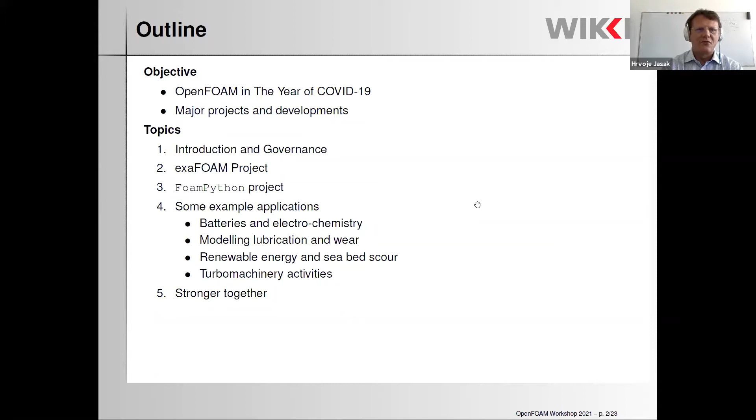There is quite substantial news to talk about, and I always like showing some nice presentations. I have already seen two of them stealing my thunder, which is really nice to see, because usually I steal the nicest presentation slides from other people and show them in the keynote before everyone else. So thank you, I will point out who the people are.

So to start, thank you to the organizing committee. And here you can see the list of some friends, old friends, and very very old friends. As Philip said, he's in the category of old friends. I know Neal Murphy longer than I know Philip, so we'll call him a very old friend. And Professor Alojz Ivanković is definitely my very, very, very old friend. But let's not pick on him because he might speak back.

On the right-hand side, I was really happy to see this logo made out of mould-free additive manufacturing. But then I realized that it says I-Form rather than OpenFOAM, but hopefully we will be able to deal with that. The virtual event in 2021 is a huge amount of effort as usual, and I'm really grateful for everyone who has put in the work to make this event happen.

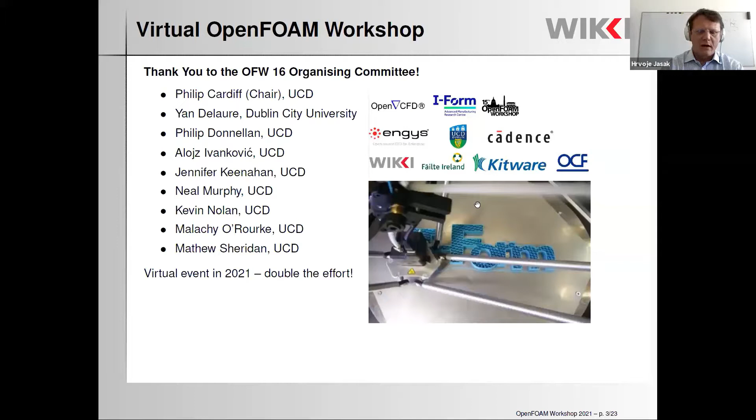I have been talking to a bunch of people over the last year, and I always start with the same question: are you safe and well? How are you coping? And to this I will add the question of, has COVID made you take up some strange hobbies? Here's a little movie of a strange hobby.

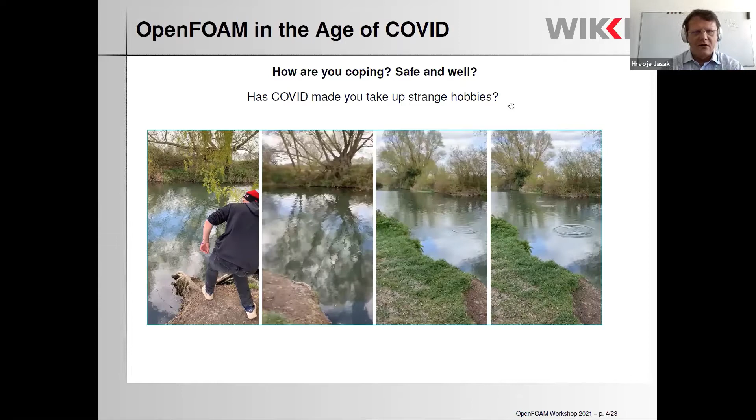Just as a comment, this qualifies as experimental work, and I don't do experiments, so it's not me, in fact. But what you can see here is the game of skipping stones, which brings us to the first showcase that I would like to show, which is a numerical study of skipping stones at the University of Cambridge. It's done as part of the master project by Stefan Nixon under the supervision of Professor Stuart Dalziel.

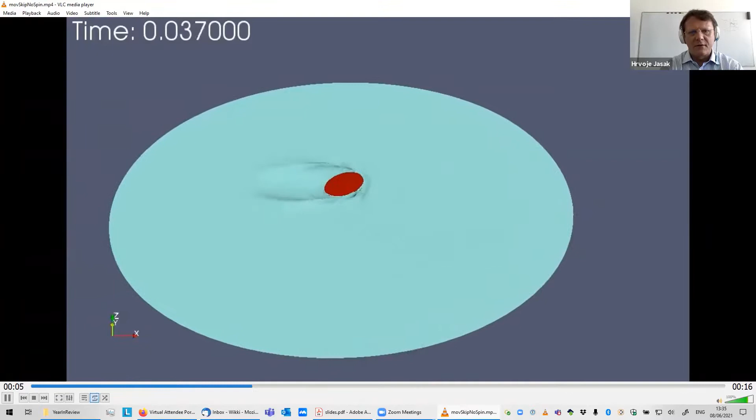And the software being used is the Naval Hydro Pack with all the bits that we have. I think it's fair to mention one of the sponsors, which is Pointwise, which in the meantime has become Cadence. So what we are doing here is wading into the arguments of what can happen when you're trying to skip the stone. What you can see here is a 6 degree of freedom stone moving, hitting the free surface and then pitching up.

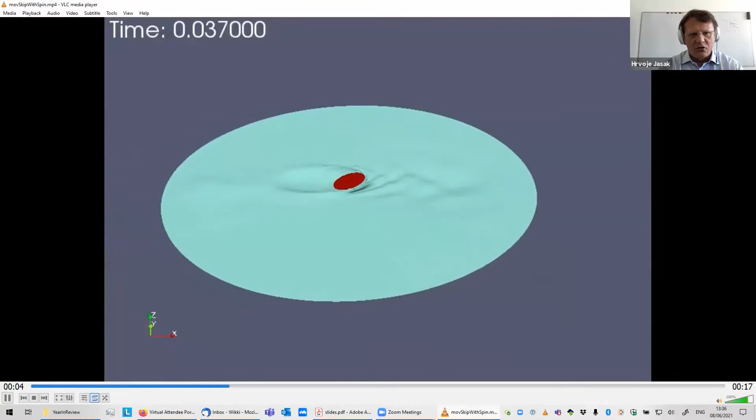6-year-old Hrvoje used to think that this is how you skip the stones, but in fact it is more complicated than that. There has been a big discussion about whether you can do that without rotating the stone around the vertical axis. So if you add vertical axis rotation around it, then the stone will jump off differently, because the rotation around the vertical axis gives it gyroscopic stability.

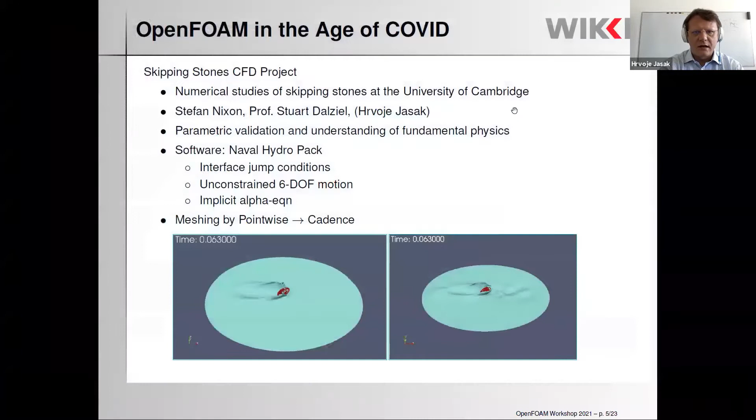These are preliminary simulations, so our free surface gets messed up a little bit before the impact, but now you can see nicely how the stone turns. Interestingly, this is a subject of some concern, meaning that doing experiments is not easy. In fact, a set of experiments has used a rate of rotation of about 100 radians per second, which is faster than I can throw the stone.

What I like about this is that doing experiments with skipping stones is not as easy as one would imagine. With CFD, we can quite accurately model what is going on. Because of the experience that we have in the simulation of free surface flows, we can actually put error bars on the simulation and carry on with that. This project has kept me amused through the winter, and I hope in the summer that I can join Stuart and do some experiments myself.

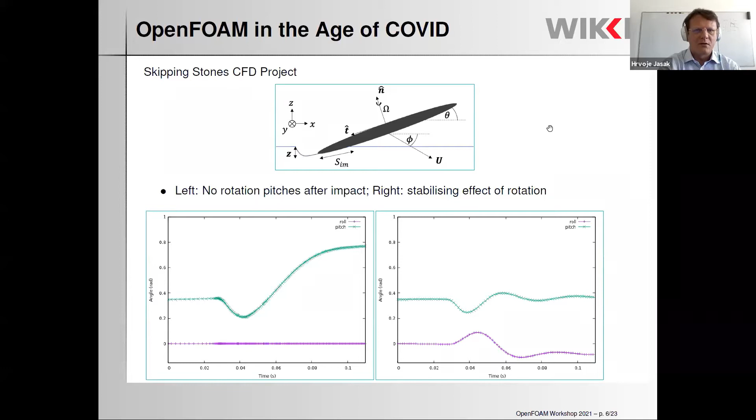So what are the other news? For me, the most exciting news is the OpenFOAM governance. The committee activities are wrapping up. We are meeting - you can check that on openfoam.com.

Governance - Dr. Fred Mendonça of ESI OpenCFD will speak about that in his keynote. And I would like to put to the spot Professor Gavin Tabor from University of Exeter, who is coordinating us and making sure that we can do things. There is a list of technical committees, but currently we are also building up application area committees, which will involve things like external aerodynamics, as well as the ones that are written down.

We are seeking members and contributors, so please join us if you can, because in this way we can make OpenFOAM even more useful, not to mention user-friendly. The second big piece of news is that we have a substantial project under the Euro HPC call of 2019 with the idea to prepare foam to actually run properly on exascale platforms.

So we need to address the OpenFOAM technology for industrial users as a priority, and that brings the same capability to the rest of us to get extreme performance on the HPC platform. That involves novel algorithms, rewrite of some of the stuff that may be limiting our efficiency and scalability, refactoring, porting, and seeking other sources of performance.

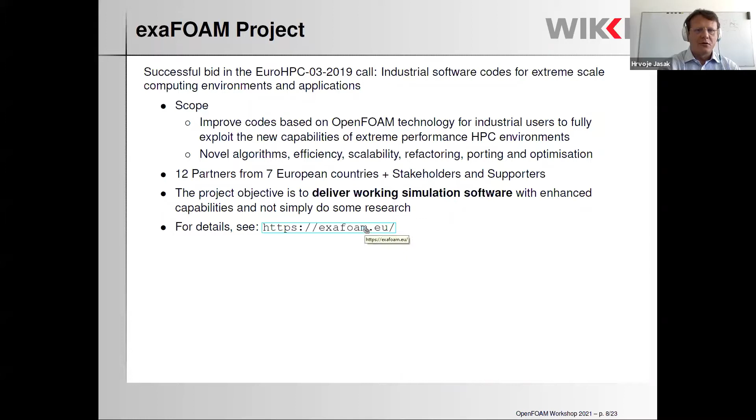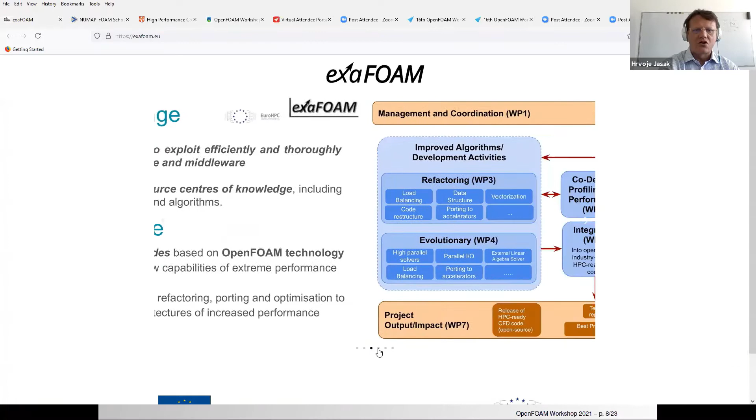The objective of the project is to deliver working simulation software. So we are not just playing, we are actually using the software to deliver the exascale solution. For more information, see the ExaFoam website, where there are a few slides on what the project does, how it is structured, and what we expect to see from it.

It compiles for a very long time. It does all kinds of things. It is hard to use in teaching, and rewriting the CPU intensive or computation intensive parts of the code is hard. So Robert Anderluh from the University of Cambridge has worked with me, or I told him what to do, in order to implement a lightweight finite volume simulation framework, which looks like OpenFOAM, but it is written in Python.

The reason to write it in Python is that debugging is easier. We lose a lot of luggage like virtual base classes and runtime selection tables, and we can re-implement the bits of the code which are performance specific to find out who can propose a better HPC framework that can be rolled out within the more demanding C++ structure.

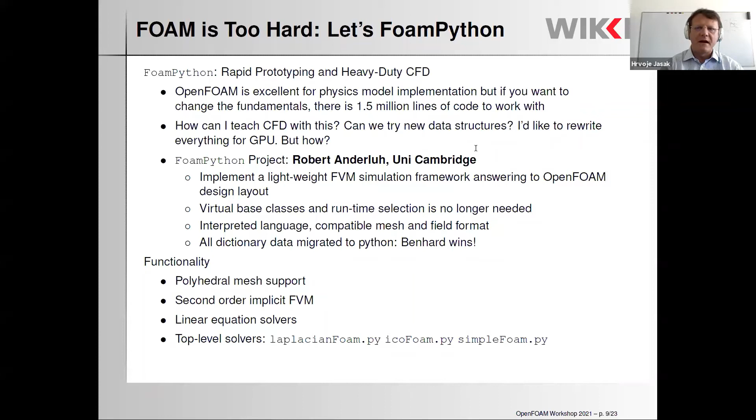All of the dictionary data, input, output, and in fact everything apart from the mesh has also been moved into Python, which means that Bernhard Gschaider and his approach finally win. The kind of functionality that we have is polyhedral mesh support, second order finite volume method, linear equation solvers, and 3 top-level solvers: Laplacian foam, icoFoam, and SimpleFOAM, which allow us to run, I don't know, a motorbike tutorial or some serious external aerodynamics cases and find out how the code behaves.

So what do we get? We are working with a small package. The whole of foam Python is several thousands of lines of code rather than 1.5 million. We can quickly experiment with the basics.

And here I don't mean implementing new turbulence models. I mean changing the way that the solver assembles and solves the matrices, and finding out what things we can do in order to adapt to the new high-performance computing platform.

So here is a little piece of code. You will see that this is not a copy of what OpenFOAM looks like, but actually creates a matrix for the DDT, Laplacian, sums them up, and then calls a solve. All of this is in Python. Robert will do a presentation later on to show you how this is made fast, efficient, and useful using things like NumPy and Cython.

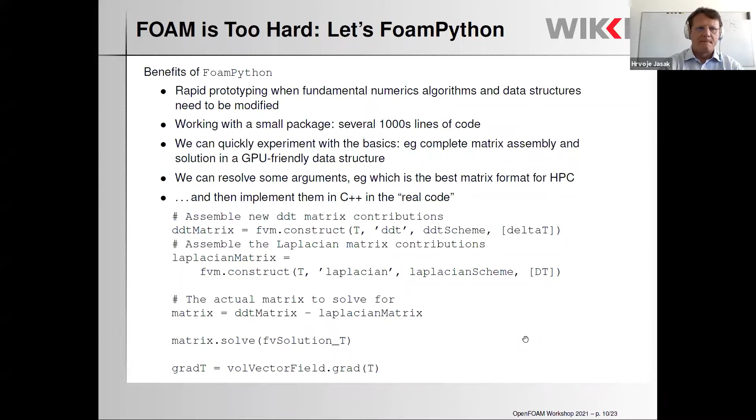Moving on, I have to say that I have already seen an excellent presentation this morning on batteries and fuel cells, which proves my first point - that OpenFOAM can do multiphysics simulations really well. Anything that can be described with continuum equations, with the possibility of zooming into porous reaction zones or microstructures, or implementing surface reaction, fits within the concept really well.

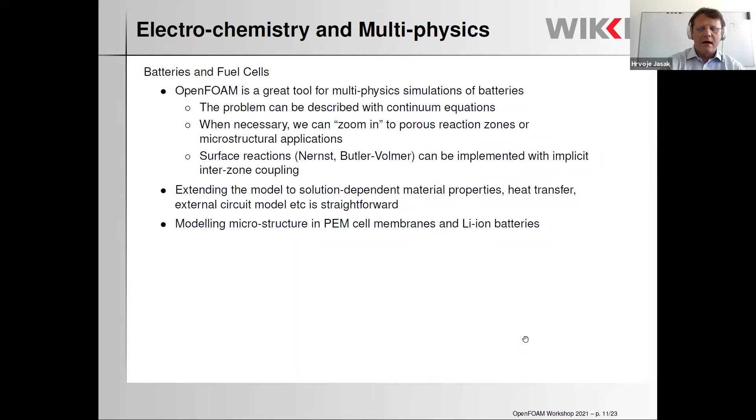In the past, we have done work on fuel cells, but I have been obsessed with batteries for a while. Having done some work on lithium-ion batteries, a new type of battery has really grabbed my attention - the lithium liquid metal battery. It started with a presentation from Professor Sadoway from MIT saying that lithium-ion batteries are not appropriate if you need power. And the kind of power I'm talking about is the renewable energy capacity of the Great Britain network, which can harvest wind and tidal energy, and then needs to store it.

We need high power capability that uses cheap materials, simple design, and will not deteriorate over a large number of cycles. An example of one of those is here on the picture on the left-hand side. So my ideal battery would be liquid, liquid, liquid, but in this one, bismuth at the bottom is liquid.

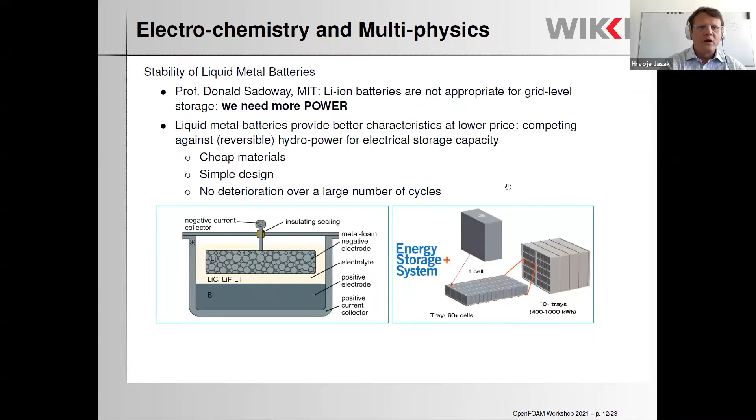Being able to do that is really nice, but it involves problems with free surface stability. The instability occurs because batteries talk to each other through magnetic fields, and upsetting the surface between my bismuth liquid at the bottom and dark blue solid lithium can cause the battery to short circuit.

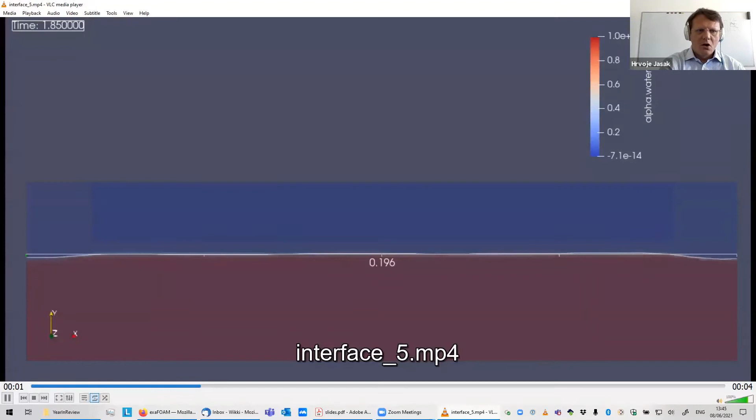What you can see here is a little piece of simulation from Fedor Misyura, again from University of Cambridge, looking at how the thickness of my electrolyte changes and finding conclusions on how to package the components of the batteries together in order to get the performance.

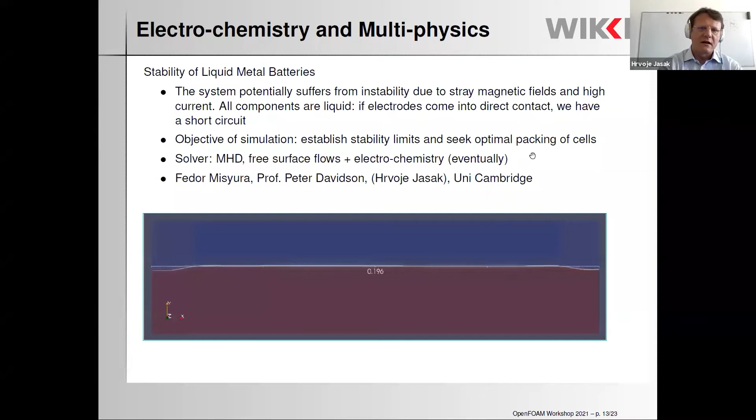I'm really looking forward to some collaborative work on this subject because I think liquid metal batteries are really coming, and they're going to be as important as internal combustion engines have been in the past.

Moving on to another thunder of mine that has been stolen. Luca Balatinec has just presented the work on lubricated contact, where we can calculate the mixed mode sliding contact between two moving surfaces, including lubrication, elastic and plastic deformation, cavitation, and various other phenomena.

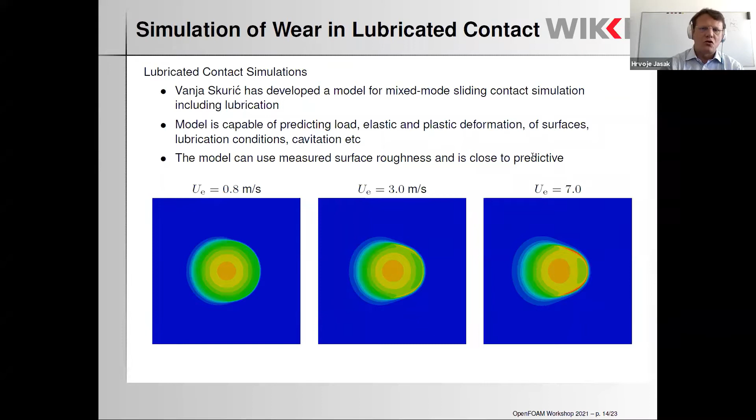In fact, we can use measured surface roughness from the two surfaces to get predictive simulations of what's going on within the contact. The work has been done in collaboration with Afton Chemical, and it was one of those - well, this is a great job, it's really fantastic, but we're interested in something else.

It turns out that the point of interest in these simulations is not the lubrication state, it is the wear rate. So building up on the model from Luca, we are working towards a wear model, which will include information on how the surface profilometry changes during wear and how that redistributes the load and influences future wear rate.

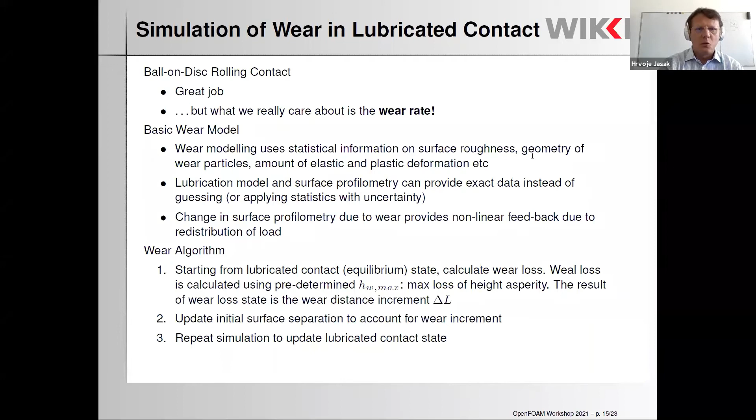A few pictures here. This is our simplified simulation using a dry contact of a pin - that's the little vertical cylinder here - with a rotating disc, where we can calculate the contact pressure, elastic deformation, and then follow the wear depth on the rotating disc underneath our pin.

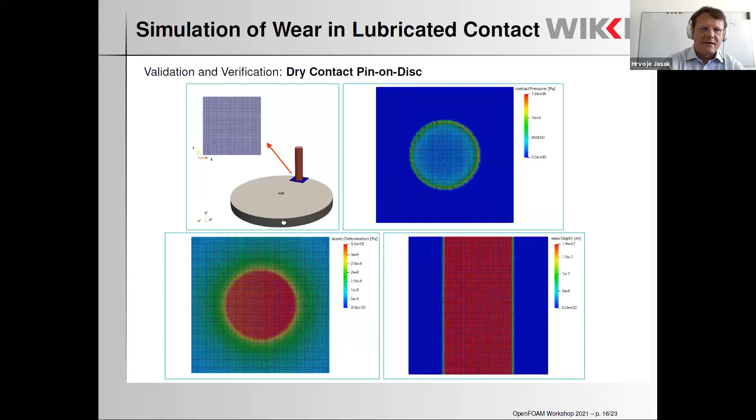The work is ongoing, and there are quite a few things that we are going to do here, starting with implementation of more sophisticated cavitation models for lubrication simulation. That will be presented by Fran Delic, and other phenomena that are really involved in this kind of simulation.

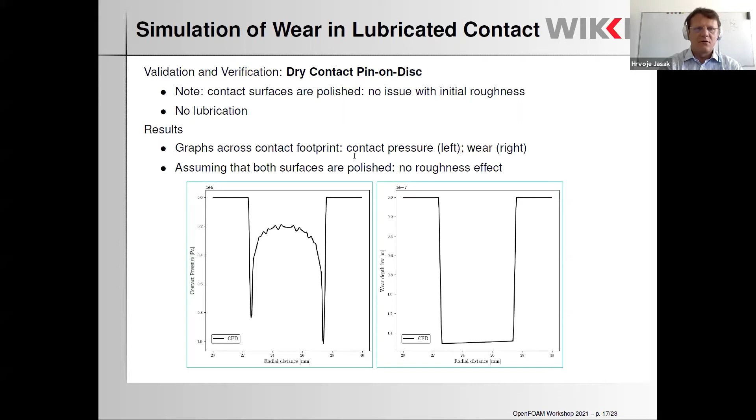Moving on, I would like to show you a couple of simulations that come out of University of Zagreb, done by master students. The first one involved kinetic turbines harvesting ocean current energy.

You can see what they look like, but putting these things in the ocean is not quite as easy. With wind turbines you have a significant wake behind them, but in water turbines the density of water is 1,000 times bigger, so the energy in the wake is also substantial. The usual question of how to optimize the local relative position of one kinetic turbine to another is still there, but we also need to look at the effects of seabed scour.

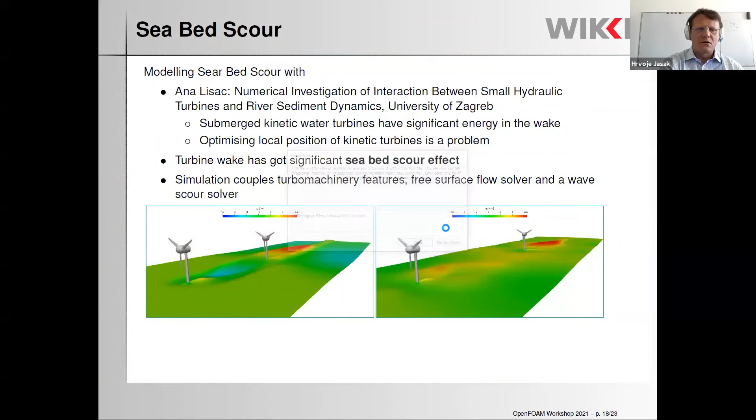Here's a little movie showing how seabed scour develops in such a simulation. This is quite a complicated solver because we are using multiple rotating reference frames, i.e. turbo machinery features, to capture the rotation of the turbines. There is a free surface on top, and we are looking at the scour profiles for various formations of these turbines relative to each other. The work was done as a master project with Ana Lisac at the University of Zagreb.

The second connecting project relates to turbo machinery simulations. The features needed to do turbo machinery well are numerous and quite sensitive and complicated: GGI, AMI interfaces, partial overlap, partial cyclics, mixing planes, moving mesh, multiple rotating reference frames, rothalpy with jump conditions, etc., for incompressible and compressible flows, have been implemented for a while. Quite regularly I get questions like 'why doesn't this work for me.' It turns out this code is used all the time, so in fact I know that it works.

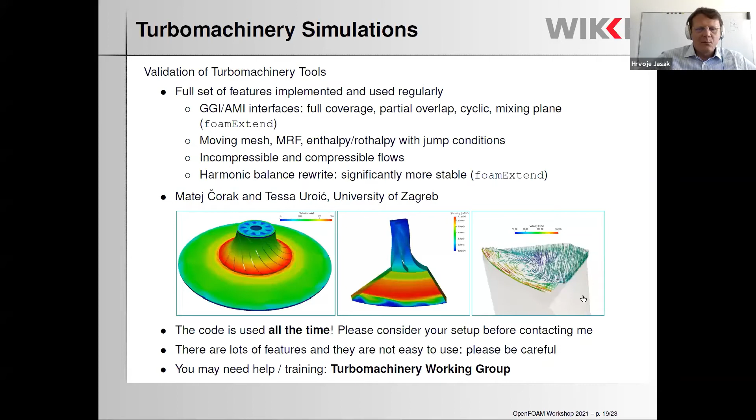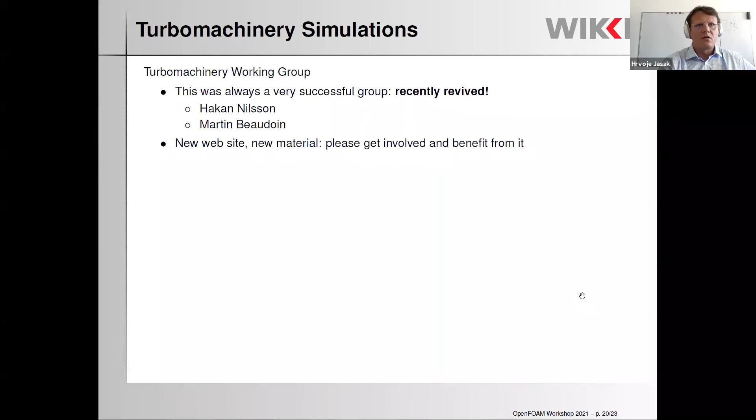As I said, there are lots of features and they are not easy to use, so you may need help or training. The ideal place for that is the Turbo Machinery Working Group. It used to be very successful and active, and recently, through the efforts of Håkan Nilsson and Martin Beaudoin, it has been revived. There will be new features, new tutorial cases, and new validation cases. Please reach out to Håkan and Martin to join, because we are at the position where OpenFOAM can do turbo machinery pretty well.

Stronger together. What do I mean by that? Well, in order to create a good simulation code, we need to collaborate with each other and push towards features that not only implement new CFD methodology or new physical models, but get them to work in a robust and reliable manner.

So how do you do that? Well, first, try and write good code: use good programming practices, understand physical models, consider the efficiency, provide I/O, HPC, ease of setup, which is something OpenFOAM is not famous for. The second is get a lot of people to use your code on a regular basis, find out what doesn't work, and fix it. And that means you. Having active, engaged, and contributing users who report not only successes but problems with the code is an excellent way of contributing to this project and making sure OpenFOAM lives long into the future.

I also have to tell you, nobody's time is free. We all eat and sleep. So don't expect that just by posting a question on the user forum or engaging with a special interest group, somebody will fix your problem for you.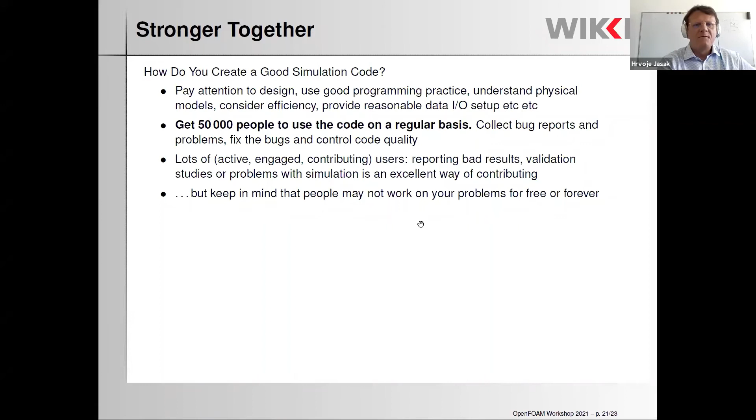An important aspect of all this is education and training. Creating a capable and engaged community requires effort. That starts with senior PhD students teaching junior PhD students what the code is like and how it works, running master projects, running seminars, commercial or free training sessions, writing books, videos, and tutorials. These are all very important aspects of that.

A little bit of an advert for me: there is higher level training as well, where the point is to create software development and simulation specialists. Currently we have the MPhil and PhD courses under my mentorship at the University of Cambridge. There is a whole network of research organizations worldwide, so whoever is presenting at this conference didn't just show up with nothing—there's substantial knowledge and experience with the code behind them.

I used to run the NUMAP-FOAM summer school, but for the last two years it has been eaten up by COVID. There is also the High Performance Computing Academy being run at the University of Cambridge, which will teach you what you need to do in order to do HPC well. Incidentally, I'm hoping to restart the summer school in 2022, and you will be informed in the usual way.